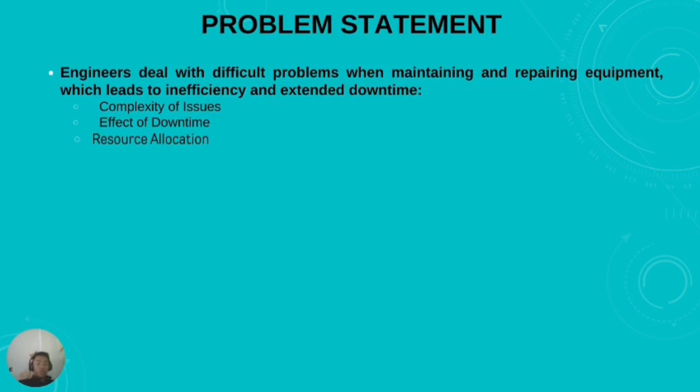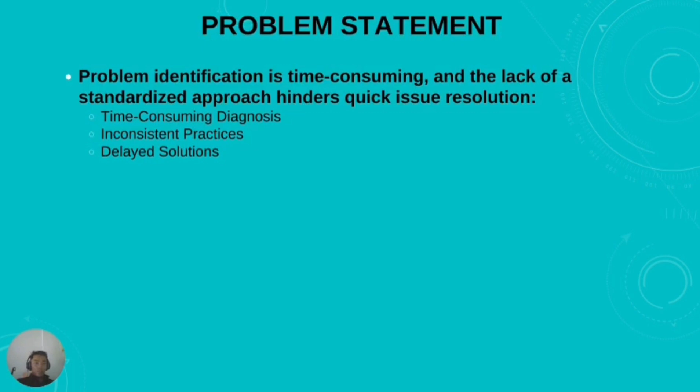Next problem statement. In this project, problem identification is time-consuming and there is a lack of a standardized approach hinders quick issue resolution. First, time-consuming analysis, inconsistent practice, delayed solutions.

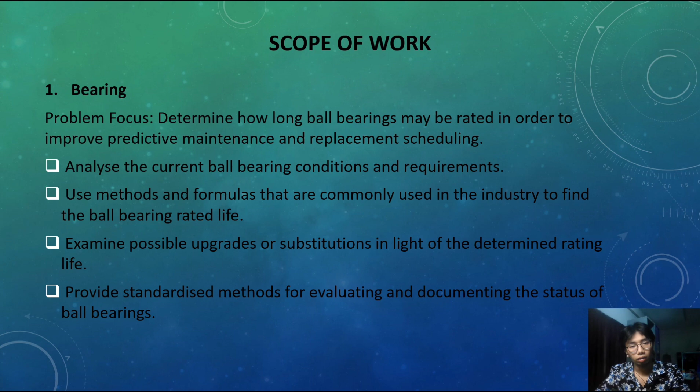Scope of work. For bearings, we focus on determining how long a ball bearing may be rated in order to improve predictive maintenance and replacement scheduling. So our research: analyze the current ball bearing condition and requirements, use methods and formulas commonly used in the industry to find the ball bearing rated life, examine possible upgrades or substitutions in light of the determined rating life, and provide a standardized method for evaluating and documenting the status of ball bearings.

So for belts, we focus on how to measure belt dimensions to streamline procurement and inventory management procedures. So we analyze the existing belt inventory and specifications, including all dimensions. Provide a way or formula for figuring out how much space each kind of belt takes up. To determine the current belt inventory volume, use the suggested methodology. Examine options for standardizing belt dimensions in order to make volume calculation easier later.

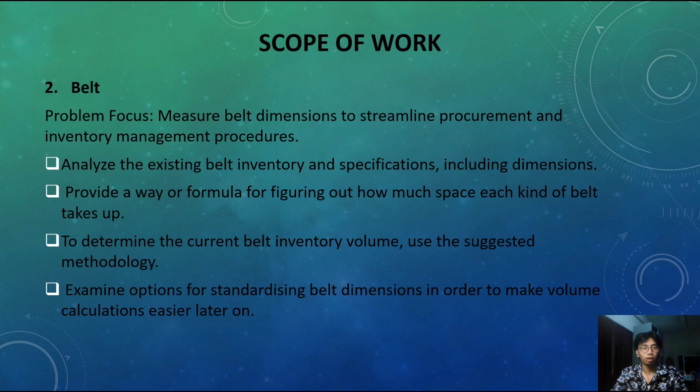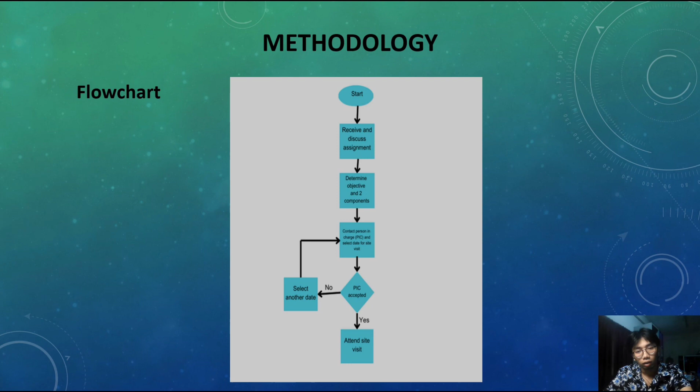So for methodology, we use a flowchart to show our progress. So we start and then receive and discuss the assignment with our team members, then determine the objective and two components that we use for our project, and then contact the person in charge and decide on what date we need to do the site visit. If the PIC does not accept, select another date. If the PIC accepts the date, we continue to attend the site visit.

At the site visit, we collect data, and after collecting data, we analyze it and then write a report, using Excel for calculation, and then presentation, submit the report, and that's all.

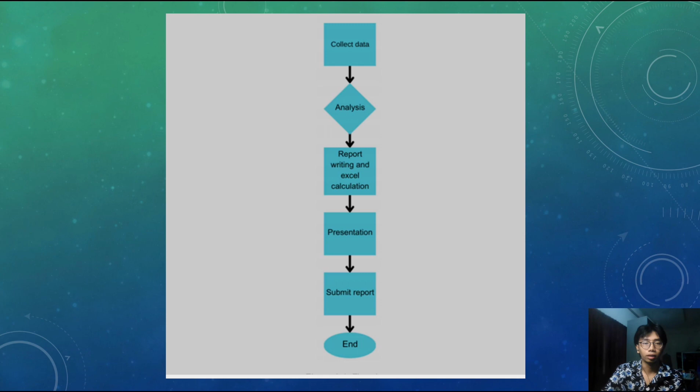So for procedure, one, perform an on-site inspection to learn about the state of the machinery and upkeep procedures. Second, relevant data such as equipment specs and past maintenance records should be methodically acquired. Third, develop and implement industry standard formulas to determine belt volume and ball bearing rated life. Using sample examples for belt and bearing, this calculation demonstrates how to use the formula. And last, use spreadsheet software, which is Excel, to develop intuitive tools for effective data organization, calculation and visualization.

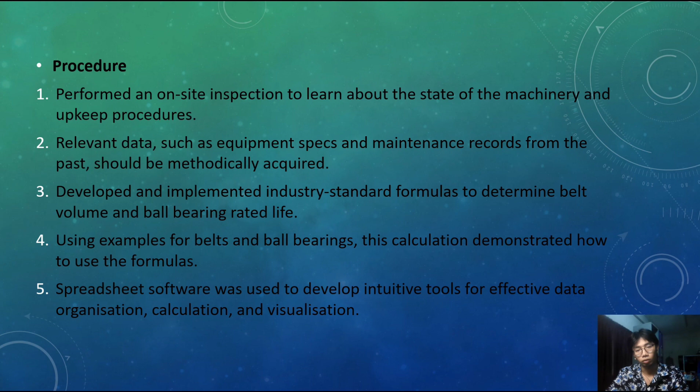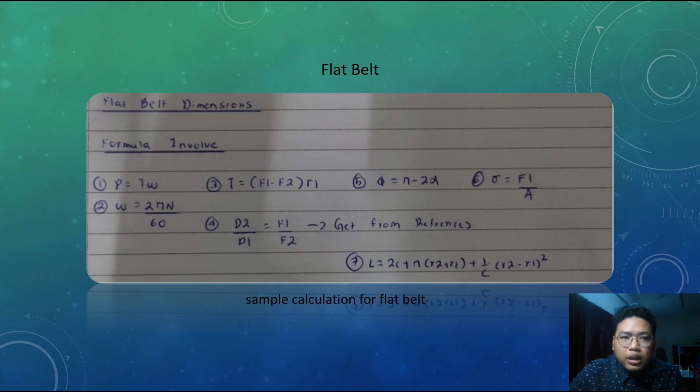And then we go to another slide, which is the sample calculation that I made for the flat belt. So basically our objective in creating this sample calculation is to get the area of the belt and the length of the belt. So the data collection that we have from the site visit is the power of the motor, the rotational speed, diameter of big pulley and diameter of small pulley, and also the value of the center distance between two pulleys.

And then we made research on the type of belt material, which is the stress. We got from the internet that they use 2 types of belt, which are aluminum carbide and silicon carbide. The axial stress for aluminum carbide is 416 megapascal, and the axial stress for silicon carbide is 588 megapascal. And then we just put the values into the formula, and we get omega is 205.28 radian per second. And then torque is equal to 53.59 newton meter.

And then we have ratio tension of about 1.01. And then we just substitute the values until we get F2 equal to 133,965.1074 Newton. And then we put the value of F2 into the ratio tension, and we get the value of the tight side, which is 135,443.34 Newton.

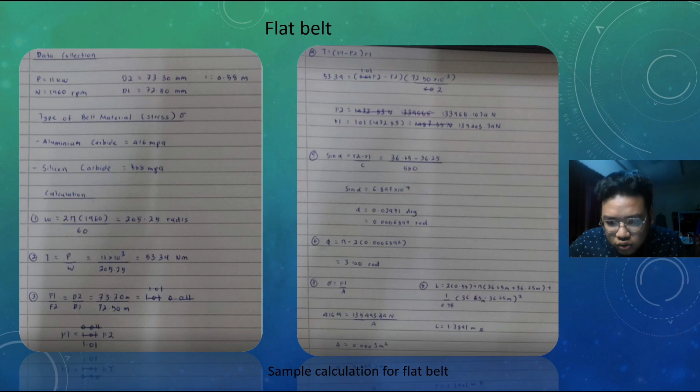And then we can get the area of the belt using this formula, which is axial stress equal to F1 over area. And then we get the area of the belt is 0.0003 meter squared. And then we just put the values for C, R2 and R1 to get the length of belt, which is 1.3891 meter.

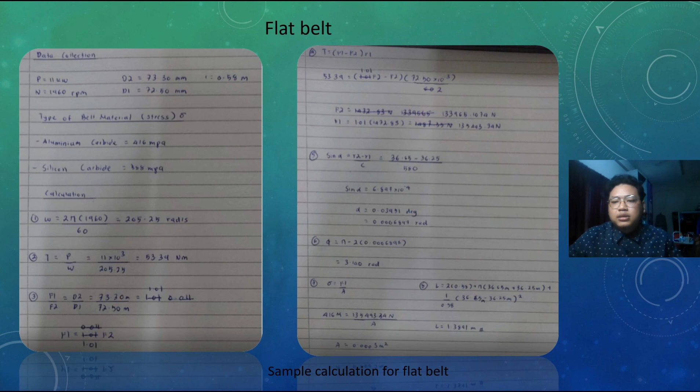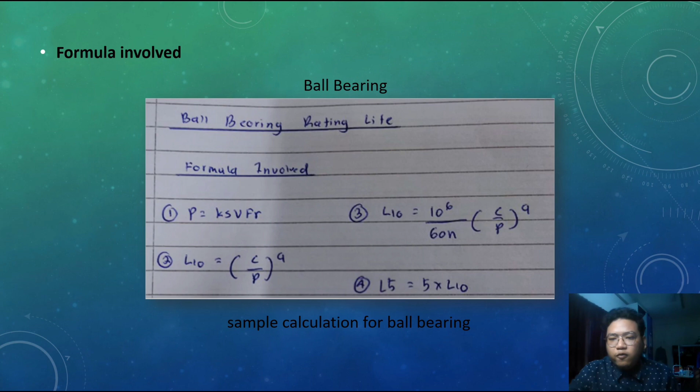So this is our sample calculation for the ball bearing. From the previous calculation, we use F1 plus F2 as the radial force, and then we calculate the rating life of the bearing. We just put all these values into the formula, and we get the equivalent shock loading equal to 269,408.45 Newton. Then we put the value of P into the second formula, and we get the rating life in revolution, which is 0.091 revolution.

And then number three, we just add the rotational speed that we got from the sample calculation before.

So we just put the value of n into this formula, and then we can get the rating life in hours, which is 0.7703, and then we can get the value of median life, which is 5 times L10 in revolutions, and then you get the value of 3.519 hours.

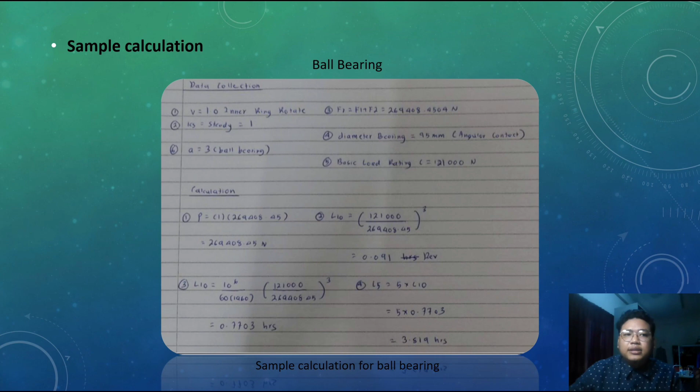So next I will explain the result from the Excel. Firstly, we choose two parameters, which are flat belt and ball bearing. For the flat belt, these are the parameters: power, diameter driven, center distance pulley, rotational speed, and belt stress. These are parameters where we can choose to change the value to get a different result for area of belt and length of belt. So this is our formula that we use.

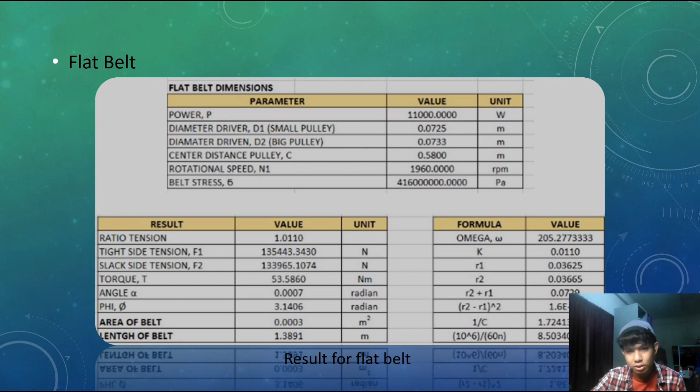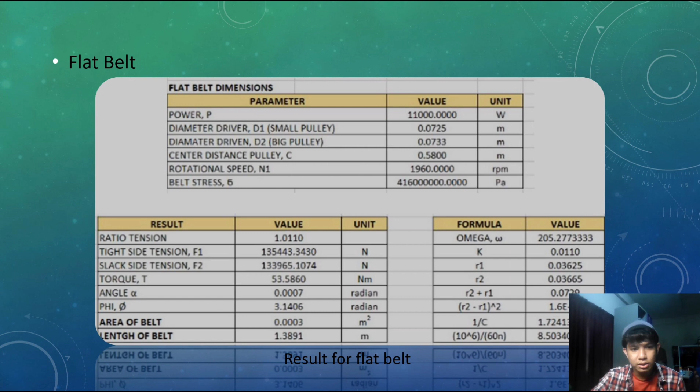In the result we have ratio tension, tight side tension, slack side tension, torque, angle, and angle of contact. This is the formula that we use to get the value of area of belt and length of belt. So when we calculate, for example, tight side tension and slack side tension, we use this formula and we get the result of area of belt and length of belt.

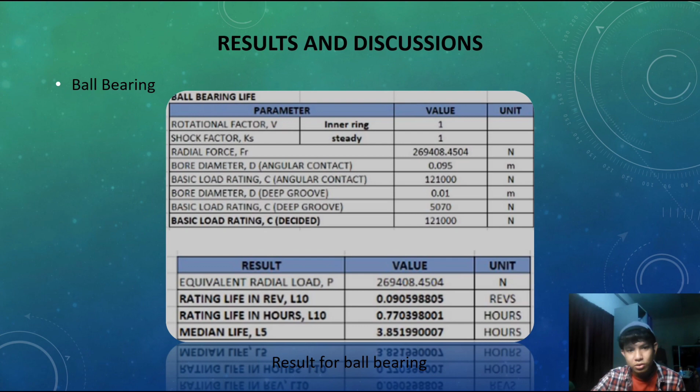So after we choose the rotational factor and shock factor, we get the basic load rating. This basic load rating we have to decide for ourselves. We have to insert the value by choosing the bore diameter. If the bore diameter is, for example, 0.095, we can choose the value in the table, and the value of the basic load rating will auto-update. So for the basic load rating, we have to insert the value. So in the result, we get the rating life in revolutions, rating life in hours, and median life.

Discussion. Firstly, determining the rated life of the deep groove ball bearing is a critical aspect to optimize equipment maintenance. These measurements serve as a basis for making strategic decisions, significantly impacting maintenance procedures. The next discussion is that the approach reduces risk and aligns with the main goal of reducing downtime and increasing equipment reliability. This marks an important step towards data-driven and responsive equipment maintenance procedures.

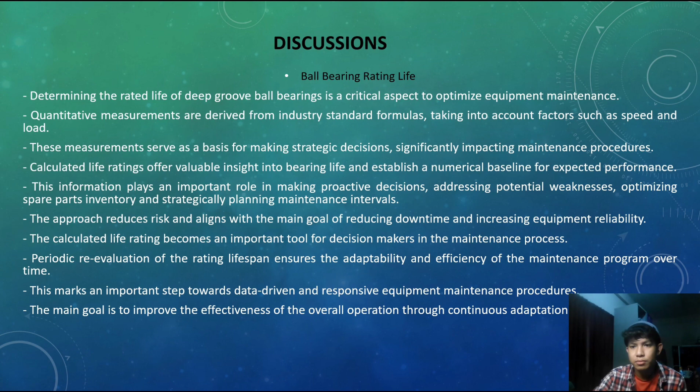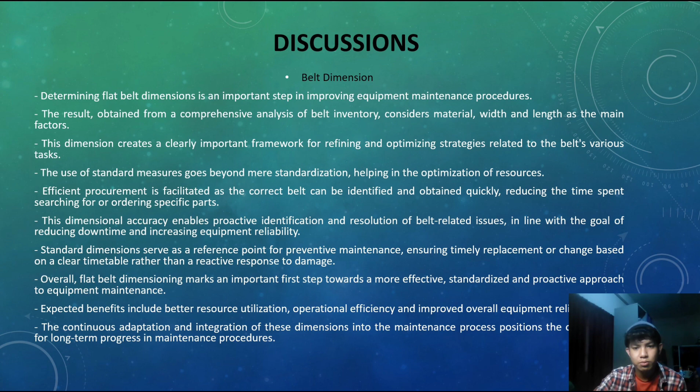This dimension creates a clearly important framework for refining and optimizing strategy related to the various tasks. Standard dimensions serve as a reference point for preventive maintenance, ensuring timely replacement or change based on a clear timetable rather than a reactive response to damage. And lastly, the continuous adaptation and integration of this dimension into the maintenance process positions it for long-term progress in maintenance procedures.

So lastly, for the conclusion, this project is poised to revolutionize equipment maintenance and repair practice by offering a structured problem-solving approach that speeds up decision making for engineers, such as the Excel that we created. It will speed up our decision making by changing the value, so we don't have to calculate from the start using the same value.

Next, seamlessly aligned with organizational goals, this initiative promises increased productivity, improved cost effectiveness, and a strategic vision of operational excellence. Beyond procedural improvement, the project includes the integration of advanced technology, a comprehensive training program, and the establishment of a collaborative engineering community focused on sharing expertise in ball bearing rating life and belt dimensions. So lastly, the expected outcome for overall organizational performance, equipment reliability, and maintenance efficiency is a positive and lasting impact.